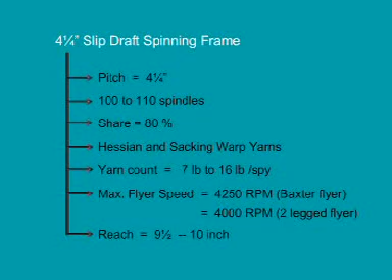This slip draft spinning frame is used to spin conventional Hessian warp, weft, and sacking warp yarn. All qualities with grist ranging from 7 to 16 pound per spindle can be spun in this machine, which can achieve maximum flyer speed of 4,250 rpm with Baxter flyer and 4,000 rpm with two-legged flyer. The reach, that is the distance between the retaining rollers and drawing rollers, is 9½ to 10 inch.

We are observing the motion of a slip draft spinning frame.

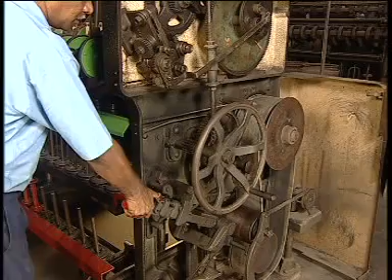The starting handle is released by pushing the trigger arm. With downward movement of starting handle, the jockey pulley tightens the Lenix belt by lever and weight arrangement. Motion is transmitted from motor to machine pulley and on to the cylinder.

Warp crowns of two consecutive flyers get drive from the cylinder. Cylinder and warp crowns are connected by a cotton or synthetic tape called listing, which is tensioned by tension pulleys and dead weight.

And also to drawing and retaining rollers through gearing. From the other end of the retaining roller, the motion is transmitted to mid-draft roller and to the heart cam. Also, the motion is transmitted for slow traverse of drawing roller.

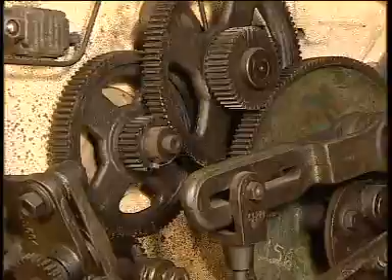We are observing the function of a slip draft spinning frame. This drafting system is most convenient for jute yarn spinning. The sliver path is not straight and hence the length of sliver path is more than the reach. The twist is imparted by rotation of a two-legged flyer and the yarn is wound on a package called bobbin.

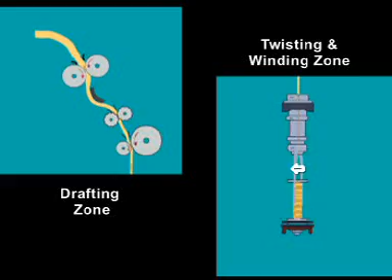We are observing the drafting zone and its function in a slip draft spinning frame. The name slip draft has been coined because the long fibers slip through the mid-draft rollers while moving from retaining to drawing rollers.

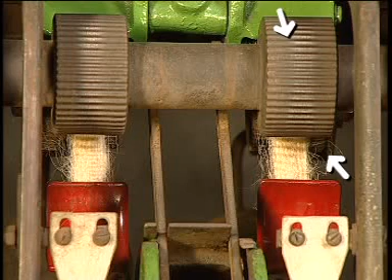The sliver enters the drafting zone through a pair of retaining and retaining pressing rollers with lever arrangement having hanging weight of 4 pounds. Both rollers have flutes. The pressure on the sliver is adjustable by shifting the weight on the lever.

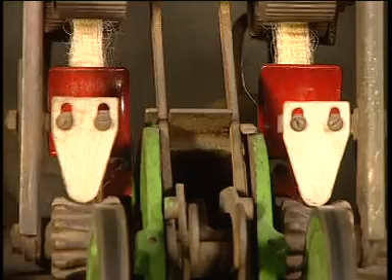Next is an adjustable breastplate. This keeps the sliver tight during the movement of sliver through the drafting zone. This ensures controlled delivery of short and long fibers through the mid-draft rollers.

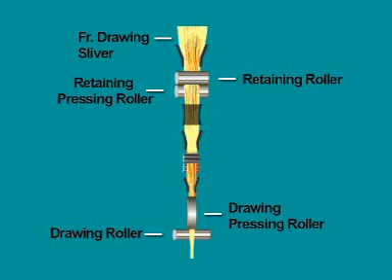Next is a deep-fluted mid-draft roller and a deep-fluted dumbbell-shaped self-weighted idler roller. There are 3 conductors for the right alignment of the sliver passage.

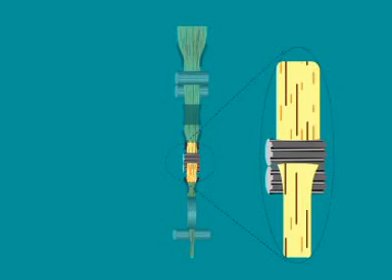The central recess part of the idler roller ensures easy movement of long fibers without break or obstruction, while exerting restraining actions on the movements of the short fibers, as we are observing.

Finally, there are drawing and drawing pressing rollers. We are observing the twisting of the fiber bundle and formation of a twist triangle.

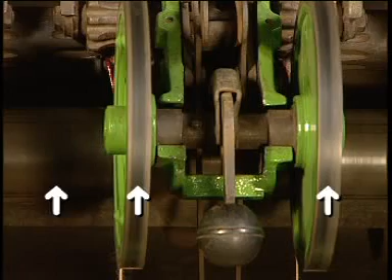Finally, there are drawing and drawing pressing rollers. The drawing pressing roller is loaded by a coil spring. The pressure is adjustable by a nut. The pressure should be adjusted after buffing of rubber cot of the drawing pressing roller.

Draft can be altered by changing the draft pinion. Higher draft pinion means lower draft and vice versa. Draft constant divided by draft pinion gives draft.

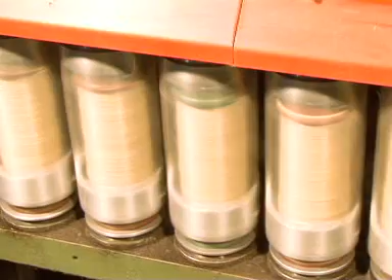We are now observing the twisting and winding zone with Baxter flyer. Nowadays, Baxter flyer is mostly used instead of two-legged flyer. The legs of two-legged flyer expand during rotation. Baxter flyer has ensured higher flyer speed without any expansion.

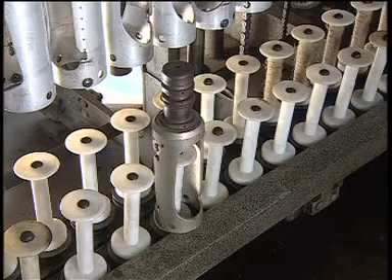In today's spinning machines with Baxter flyers, both the bobbin size and the lift have been increased. As a result, the yarn content per bobbin has been increased. The Baxter flyer has a warp cap and warp crown with a central hole through which the yarn passes.

The yarn passes through an inner tube of the flyer and then under a specially designed long notch of the flyer body and subsequently to the bobbin through the flyer eye.

At each point where the yarn comes under contact with the flyer body, there are porcelain guides to avoid abrasion between the aluminum part of the flyer and yarn. Due to passage of yarn through the inside surface of the Baxter flyer, the ballooning of yarn is avoided.

Due to the direct contact of jute yarn and steel, the steel body gets cuts. Due to centrifugal force, the legs of the flyer expand during its rotation, and also the yarn expands due to ballooning effect. Let us now understand twisting and winding of yarn.

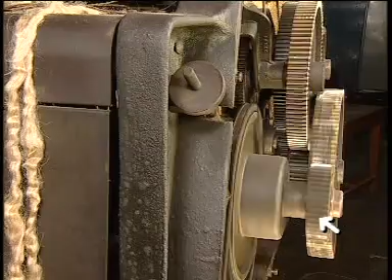Twist can be altered by changing the twist pinion. Higher twist pinion means lower twist and vice versa. Twist constant divided by twist pinion gives twist per inch.

A bobbin carrier is placed on the dead spindle fixed on the bobbin rail. At the back surface of bobbin carrier, there are 4 felt bobs which are pivoted with adjustable clips. The positions of the felt bobs can be adjusted to change the average spinning tension.

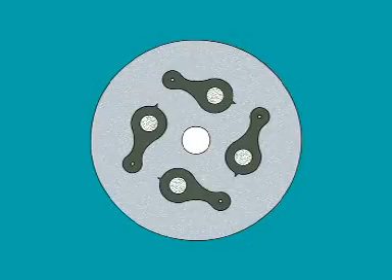Position A gives lowest tension and hence used for spinning finer yarns. While position C gives highest tension and hence meant for coarser yarns.

At the back of the bobbin, there are 8 holes, 2 of which get easily secured on 2 pins located on the bobbin carrier. A bobbin is placed on the bobbin carrier and rotates with the yarn drag. Winding takes place due to the difference of speed between flyer and bobbin.

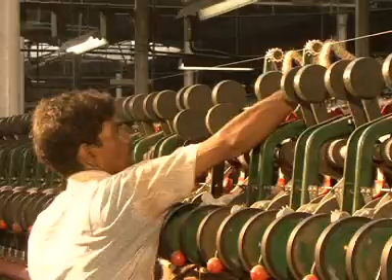Let us now see the piecing of yarn. During piecing, the weight is lifted manually to allow sliver entry into the drafting field. Piecing is done by taking yarn from the running bobbin or from an external bobbin. The yarn is then fed over the drawing pressing roller.

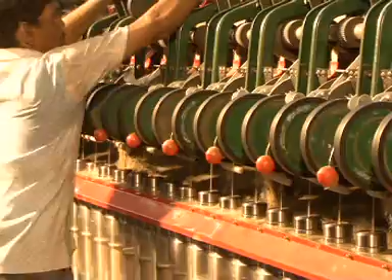It gets overlapped and twisted with the drafted fiber mass. Thus the new yarn formation continues. The grist of the piecing portion is just the double of that of the yarn being spun.

Let us now see the function of the mechanical stop motion. This stop motion is activated by a detector assembly. The short lever notch

is connected with a yarn feeler. The feeler is pushed by the yarn while spinning continues and the notch gets out of contact of the mid-draft roller.

This short lever is attached to a long lever. A stopper weight and a nipper assembly are attached to the other end of the long lever.

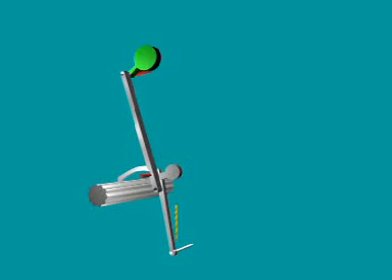When the yarn breaks, the short lever notch comes in contact with moving mid-draft roller and is pulled. With this action, the long lever gets pushed and the weight falls, while the nipper detaches the drawing pressing roller and prevents sliver entry into the drafting field.

During piecing, the weight is lifted manually to allow sliver entry into the drafting field, and when piecing is done, short lever notch gets out of contact of mid-draft roller.

Two levers called T levers are actuated by a small handle near the starting handle. When the handle is down, T levers drop down and the stop motion gets activated.

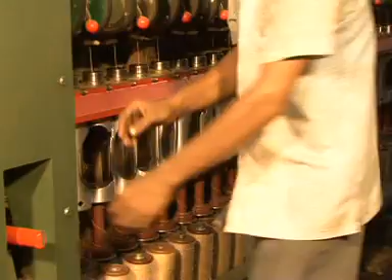At the start, T levers are not actuated and thus the stop motion is also not activated. After a little building of bobbin, the T levers are actuated and so the stop motion starts working.

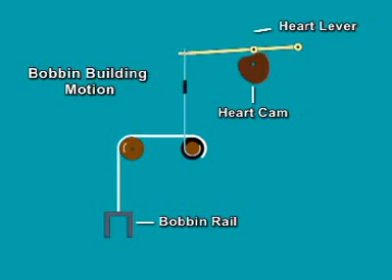We are now observing the basic mechanism behind the bobbin building motion. Bobbin building motion, that is up and down movements of bobbin rail, is actuated by a heart cam through levers, pulley and chain.

With one complete rotation of cam movement, one complete up and down movement of bobbin rail occurs.

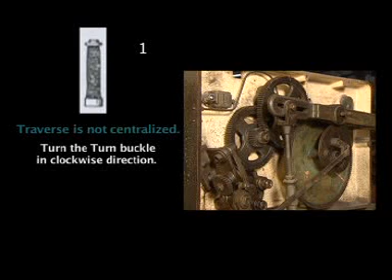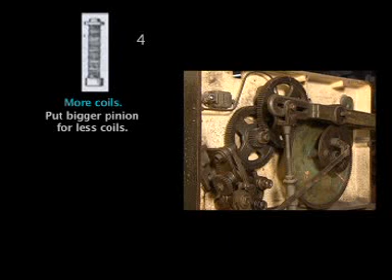During building, bobbin may have various defects. These defects can be rectified by adjusting turnbuckle. These defects can be rectified by shifting traversing lever position. Yarn coil spacing in bobbin can be changed by changing the pinion at the other end of the retaining roller.

Now let us see the doffing mechanism. There are two sets of bobbin rails. One is working and the other is spare.

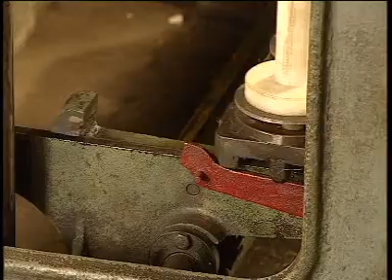When the bobbin is nearly full and bobbin rail is at the top position, the spare bobbin rail with empty bobbins is shifted inside by a foot wheel. There is a dog lever which prevents further movement of spare bobbin rail.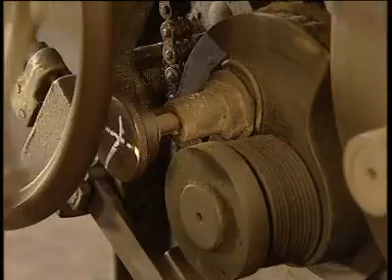When the bobbin is full, by engaging hand wheel gearing, by pushing a hand lever clutch, the building motion is detached by disengaging a plunger knob with the help of a hand wheel. The downward movement of bobbin rail is actuated.

The full bobbin rail is brought down by rotating the hand wheel. When the rail comes in contact with the shifting rail, the dog lever is released. Now the full bobbin rail is shifted outwards for doffing by the foot wheel, and the empty bobbin rail is lifted to the spinning position by the hand wheel.

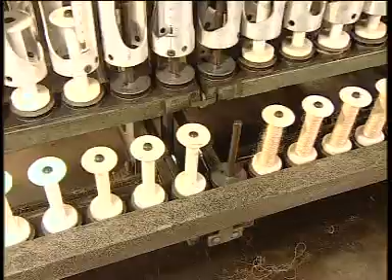Now the plunger knob is released with the help of the hand wheel to activate the building motion. The hand wheel gearing is seen getting disengaged by the hand lever. The full bobbin rail is brought down by rotating the hand wheel. Now the full bobbin rail is shifted outwards for doffing by the foot wheel, and the empty bobbin rail is lifted to the spinning position by the hand wheel.

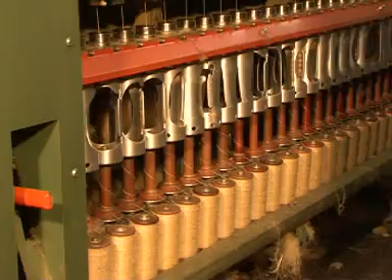Full bobbins are doffed and placed on the spiked cart for winding.

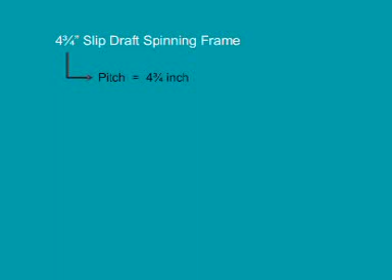This is a slip draft spinning frame with a pitch of 4 and 3/4 inch. This frame has 96 spindles and can spin 7 to 32 pound per spindle yarn.

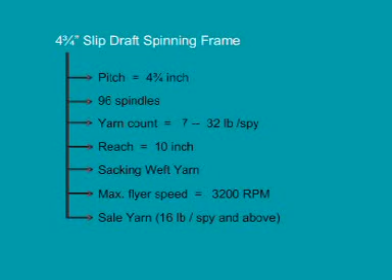This machine with a reach of 10 inch has Baxter flyers. Nowadays, sacking weft yarn is being spun in this machine at a flyer speed of 3200 rpm or more, using a 3 drawing system with more percentage of long jute. Apart from sacking weft, sale yarn of heavier counts, that is 16 pound and above, are also spun in this machine.

The drafting zone contains retaining and pressing rollers, breastplate, mid-draft roller with self-weighted idler roller, and drawing rollers with drawing pressing rollers.

In this machine also, draft and twist can be changed with the help of draft and twist pinions respectively. It has also a simple mechanical stop motion.

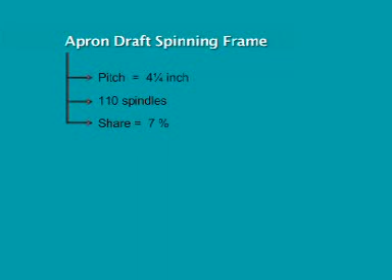This is an apron draft spinning frame with a pitch of 4 1/4 inch and with 110 spindles normally. Its share is only 7% of the total spinning frames in the jute industry. This machine is used to spin yarn in the count range of 4.8 to 12 pound per spindle. 90 to 100 pound per spindle sliver is used.

This machine with a reach of 10.5 inch has Baxter flyers. Maximum flyer speed is 4750 rpm. The 4 and 3/4 inch apron draft spinning frame is used to spin yarn in the count range of 6 to 16 pound per spindle, with a maximum flyer speed of 4500 rpm.

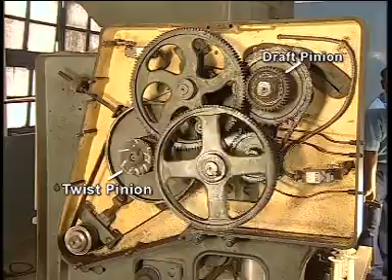Here also, the draft and twist can be changed with the help of draft and twist pinions respectively. It may have a mechanical stop motion or a pneumofil system for collecting broken ends.

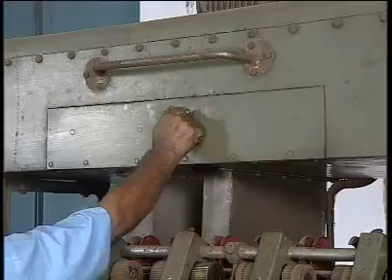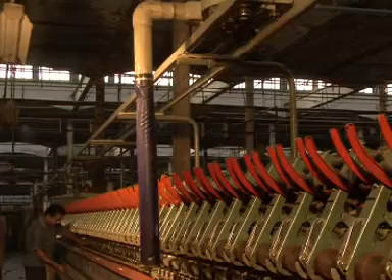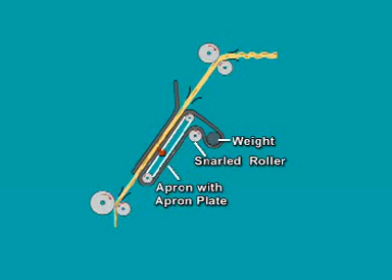It is a top-arm drafting system, which is a modern loading arrangement for exerting pressure on the bottom rollers and apron. The drafting system consists of: A, a groove bottom retaining roller; B, a positively driven apron, driven by a snarled roller and guided by an apron plate with two free moving rollers. The apron plate has two recess slots for controlling long fibers.

C, a drawing roller with fine grooves. The top arm holds a grooved retaining roller, a fixed apron plate with light spring loading, and a rubberized drawing pressing roller with cot.

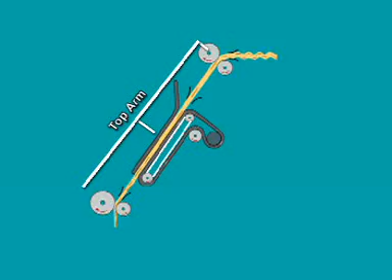The top arm is specially loaded by an external coil spring. This spring pressure is distributed to the drawing pressing and retaining pressing rollers.

For the 4 1/4 inch AD frame, there is a specially designed conductor at the back of the retaining rollers. This allows entry of thinner slivers weighing between 90 to 100 pounds per spindle. The traverse motion is actuated on the mid conductor prior to entry of sliver into the apron zone.

There is a floating conductor in front of the drawing roller which aligns the position of the sliver with the traversing conductor at the mid zone.

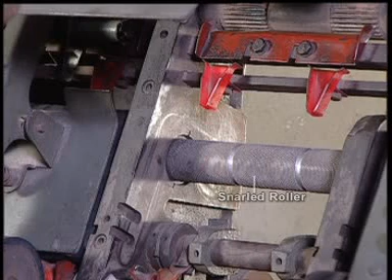And an apron plate with two free moving rollers. The apron plate has two recess slots for controlling long fibers.

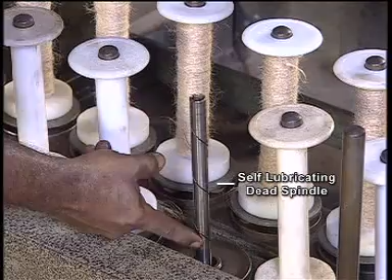Dead spindle with oil circulation slot.

Ball and spring for reduced spinning tension.

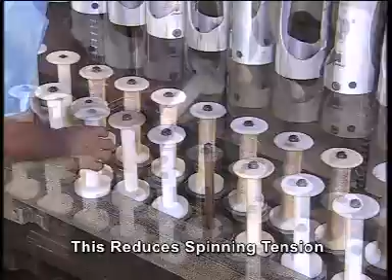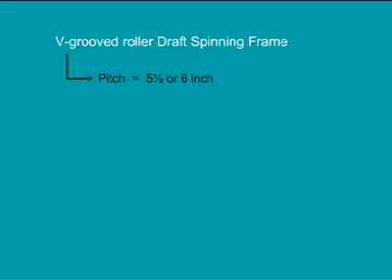This is a V-groove roller draft spinning frame. The pitch of this machine is normally 5 1/2 inch, but it can be 6 inch also. With 80 spindles, it is used for spinning sacking weft or coarser yarn. Its share is around 10% of the total spinning frames in the jute industry. It can spin yarn in the count range of 18 to 48 pounds per spindle.

Here, the reach is 10 inch, but the length of the sliver path is a little more in the drafting zone. The yarn can be spun using Baxter flyers with a maximum speed of 2400 rpm and 2800 rpm using 2 drawing and 3 drawing systems respectively. To achieve higher speed, more percentage of long jute should be used. To achieve higher production, presently a better batch composition for sacking warp with 60% long jute is used.

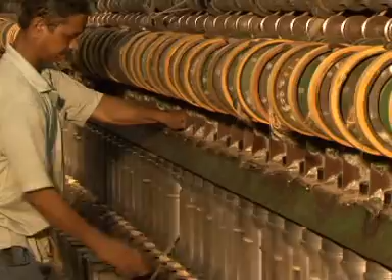Let us now see the piecing of yarn in case of its break. Piecing is done by taking yarn from the running bobbin or from an external bobbin.

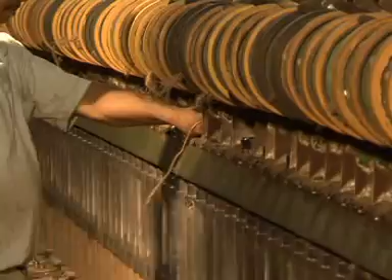The yarn is then fed over the drawing pressing roller. It gets overlapped and twisted with the drafted fiber mass. Thus, the new yarn formation continues. The grist of the piecing portion is just double that of the yarn being spun.

We are observing the feed of the sliver over the positively driven creels. Here also, the change of draft or twist is done using draft or twist pinions respectively.

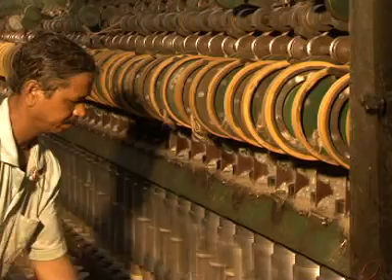The drafting zone consists of: A. Retaining and retaining pressing rollers, B. V-condenser, C. V-draft rollers, D. Self-weighted idler roller, E. Drawing and drawing pressing rollers.

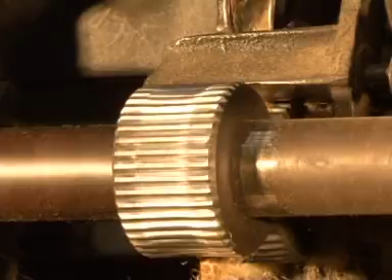In the drafting zone, prior to the entry of sliver to the nip of the drawing rollers, a pair of grooved drafting rollers with a self-weighted idler roller are used to control the short fibers.

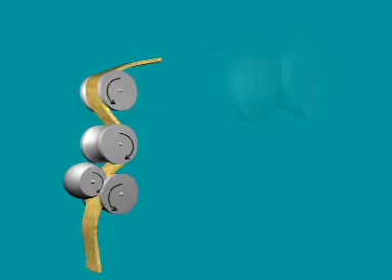The idler roller ensures easy movement of long fibers without break or obstruction, while exerting restraining action on the movement of short fibers, as we are observing.

The yarn passes through the warp cap hole and then through the Baxter flyer. Ultimately, the yarn is wound on the bobbin.

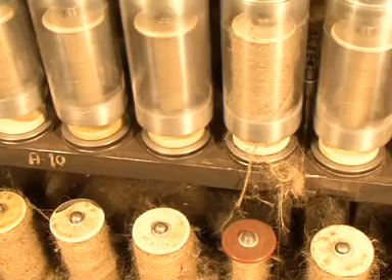We are observing now the cleaning of the spinning frame.

We are observing now the process of oiling of rollers by oil can.

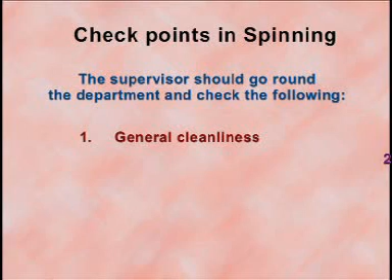Checkpoints in spinning: the supervisor should go round the department and check the following: 1. General cleanliness. 2. Dock position. 3. Position of sliver cans, both running and stock.

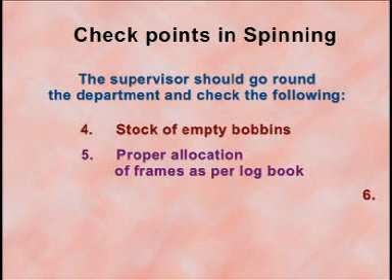4. Stock of empty bobbins. 5. Proper allocation of frames as per logbook. 6. Any mix-up materials. 7. Any working problem and any breakdown. 8. Any maintenance operation on any frame. 9. General running of the department.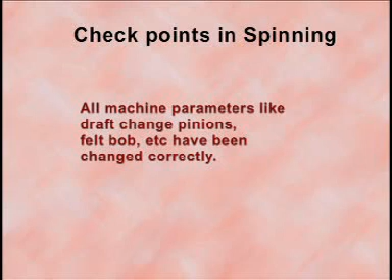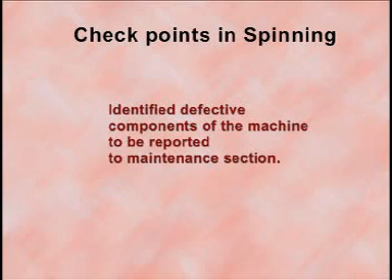All machine parameters like draft change pinions, felt bob, etc. have been changed correctly. While piecing export quality, check whether colored yarns are being used. Correct building of bobbins and idle spindles are to be checked and rectified if necessary. Identified defective components of the machine are to be reported to the maintenance section.

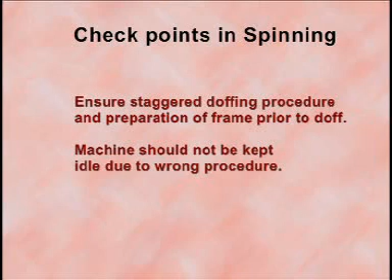Ensure minimum waste at piecing and can changing. The operator must keep waste in the bag tied on his waist. Ensure staggered doffing procedure and preparation of frame prior to doff. The machine should not be kept idle due to wrong procedure.

Missing, loose or broken stop motions are to be checked and corrected. Causes of breaks are to be identified and remedial measures taken. Ensure that the operator must piece at least 4 breaks per minute.

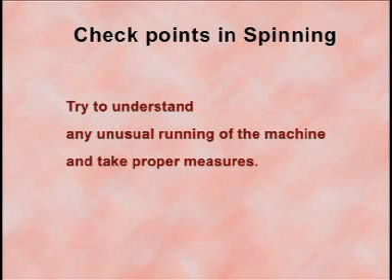Try to understand the instructions from seniors and act accordingly. Try to understand any unusual running of the machine and take proper measures. Ensure minimum downtime of the machine for any reason whatsoever. Ensure yarn quality is checked. Special care is to be taken for export quality.

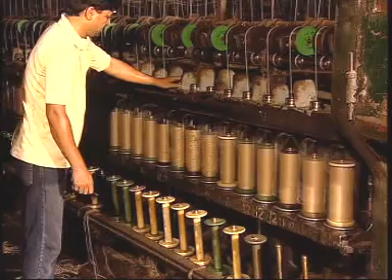We are observing the flyer twisting frame. Contrary to a spinning frame, it has only twisting and winding zones. Instead of a drafting zone, only a delivery arrangement has been incorporated. Drive and building motions are similar to a flyer spinning frame, excepting the rotational direction of the flyer, which is anti-clockwise.

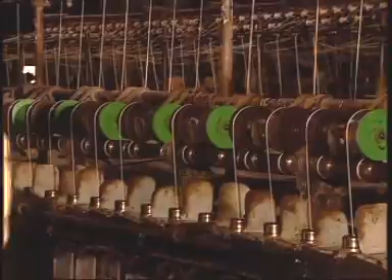In the twisting zone, either a two-legged flyer or a Baxter flyer is used. Here, a two-legged flyer is seen being used. The flyer speed is around 2000 rpm, and it has 80 spindles. Two or more single yarns are fed to the machine separately, either from a spool or a bobbin, which is placed on a creel situated at the frontal side of the machine.

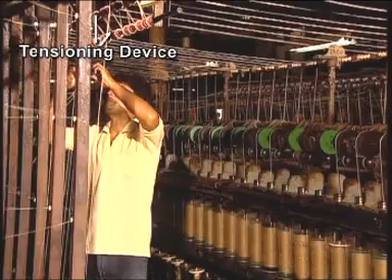The yarn comes by end-on delivery over the twister head. A creel on the machine top is also used in some machines. Here we are observing that two single yarns, each of 8 pounds per spyndle, are being fed from the creel through a tensioning device and porcelain guides. After passing through the porcelain guides on the machine, the two yarns enter into the twisting zone.

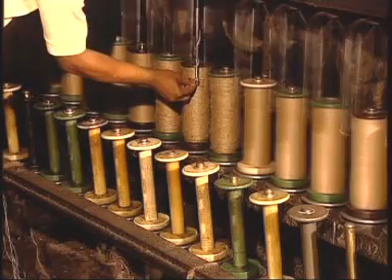Here, a knot has not been given, so as to allow it for proper knotting at winding. The flyer is moving in the anti-clockwise, or S, direction, so the plying of yarns occurs with twist in the S direction. One rotation of the flyer imparts one twist. Winding of the plied yarn on the bobbin occurs due to the difference of flyer and bobbin speed.

We see the safety guard has not been provided on the driving wheels. There should be a guard to avoid accident.